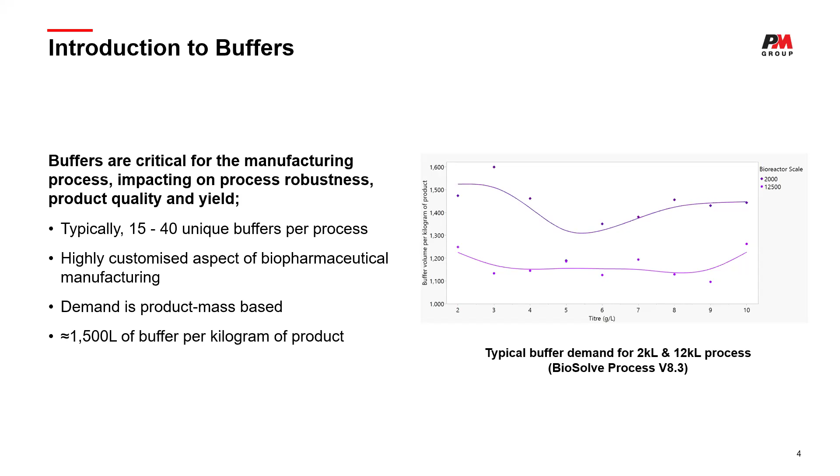If I start with overview of buffers, buffers are critical components of the biopharmaceutical industry because they have a great impact on the process robustness, the product quality, the yield, and especially cost. For the production of 1 kilogram of a typical monoclonal antibody, around 1,500 liters of buffers are required. And this is not just a single buffer, but rather 15 to 40 different buffers.

So a buffer is an aqueous solution of a weak acid and base pair, and a salt is normally added to set the ionic strength of the solution. The most important property of buffers is they keep the pH invariable when small quantities of a strong acid and base are added.

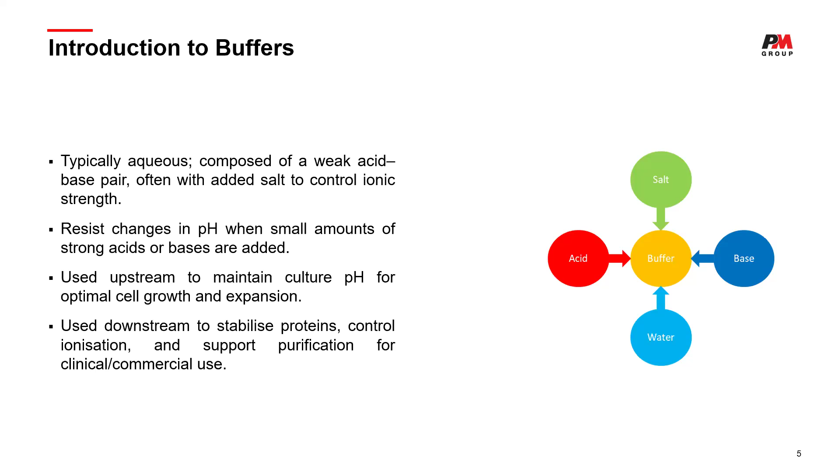So they are normally used upstream of the process to optimize the conditions for cell growth and expansion, or downstream to assist with the protein purification, control the ionic strength that is very important for the chromatography operation, and to stabilize the protein and ensure that it has the optimal biological activity for its commercialization.

Across the industry, we have like 10 raw materials that make up more than 90% of the buffers that are used for bioprocess. This is very important because many of the buffers share the same components, and this means we can standardize a bit the production process.

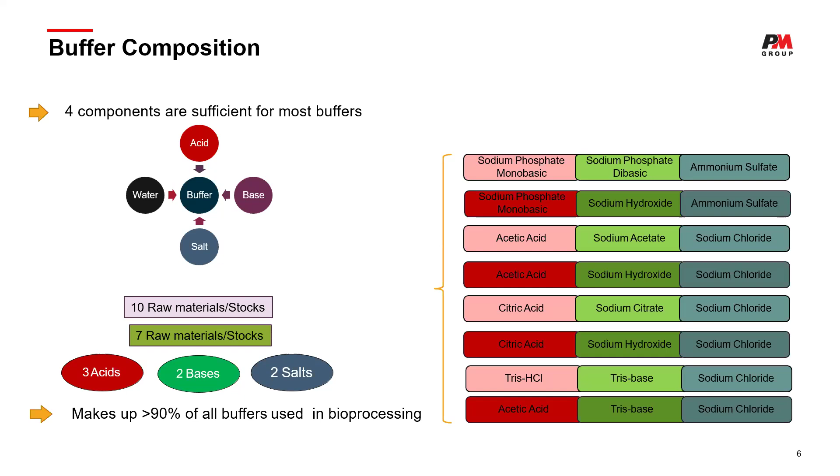However, the buffer preparation design is one of the most complex aspects of a facility design because they present many challenges. Some of the challenges are that they have a high capital cost involved because you require new equipment to be installed or you have to replace the equipment. The operating costs are very high too because of the large volumes that are required to produce the final product. They have a huge impact on the footprint of the plant.

They have ergonomic challenges, and they are normally a bottleneck for the process because you require large volumes in a very short period of time. They are dependent on the product mass. So this means if we increase the production in the bioreactor, we are going to have more protein delivered to the downstream process. And just to cope with that, we have to increase the capacity of the resin used in chromatography, or you have to increase the number of cycles.

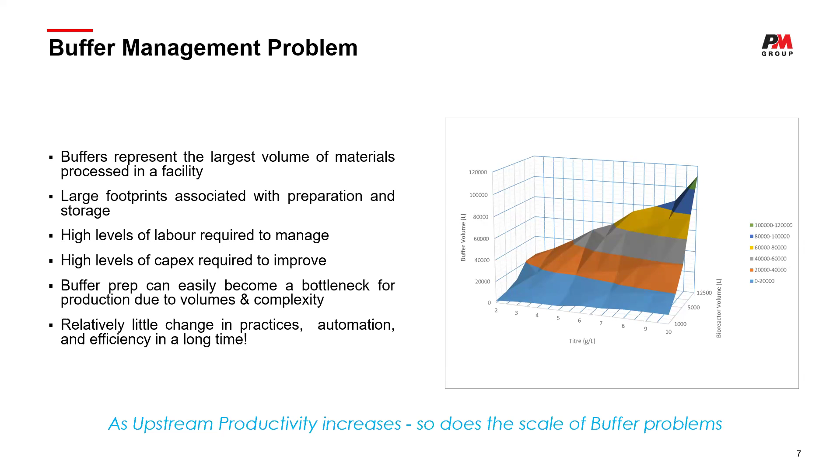That is going to increase the number of buffers that are going to be used. This is coupled with an increase of the WFI consumption. So we will have to produce more WFI to be able to prepare more buffers. That WFI has to be also stored. The extra capacity of the buffers will require extra capacity to be prepared, and they will have to be stored. And then we are going to have more waste. So even though this looks very complicated, it is feasible. It can be feasible sometimes, but it's going to have a great impact on cost.

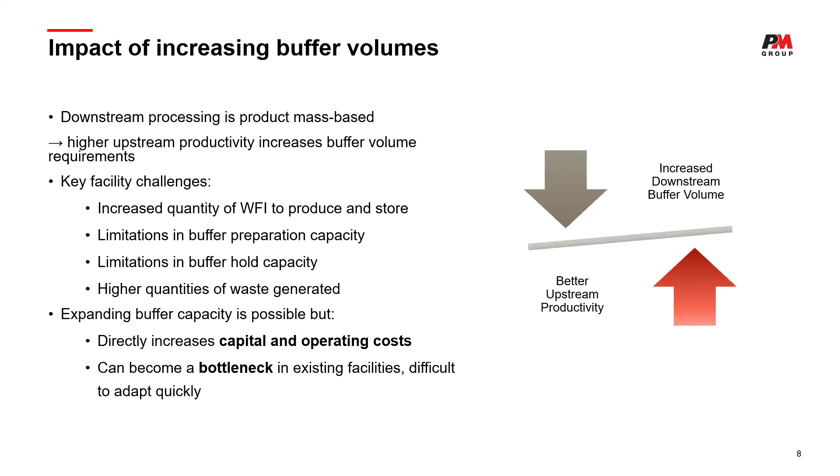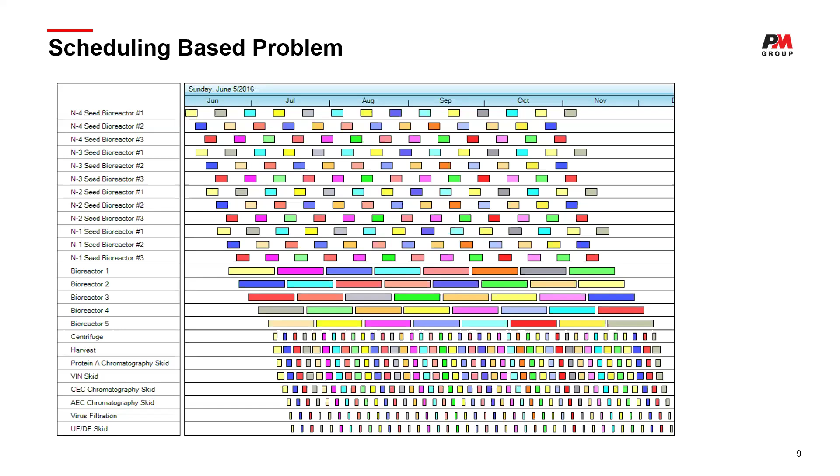But it's true that for certain existing facilities, when you increase the number of buffers significantly, you can have a bottleneck. And this bottleneck is just a schedule problem that is dependent on the buffer availability and how the equipment is operated. So what you can see now on the screen is a diagram from SchedulePro that represents different buffers and how they move across the production steps. Each color is a buffer, and you can see the buffers are delivered to the downstream processes with an interval of very few days. This can be 2 to 3 days for a very high throughput process. And what this translates into is you need to have the buffers prepared and ready to use in that short period of time.

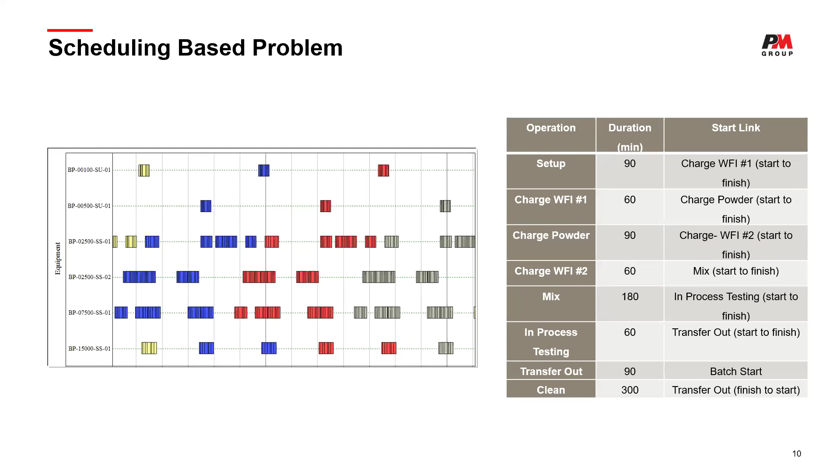Furthermore, each preparation equipment can only prepare one buffer per shift. A buffer typically takes between 8 to 12 hours to be prepared. And this is independent of the demand or the conditions that you have. So if you have an increase in the demand, you will have to achieve an equilibrium between the equipment requirements and how it is going to be operated.

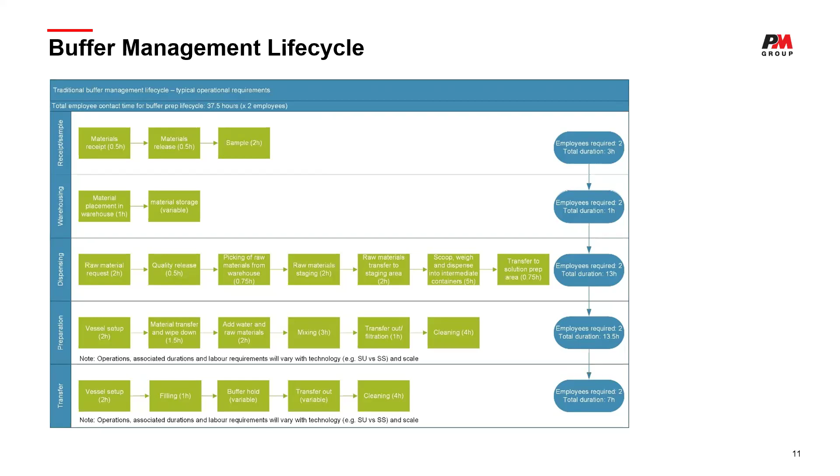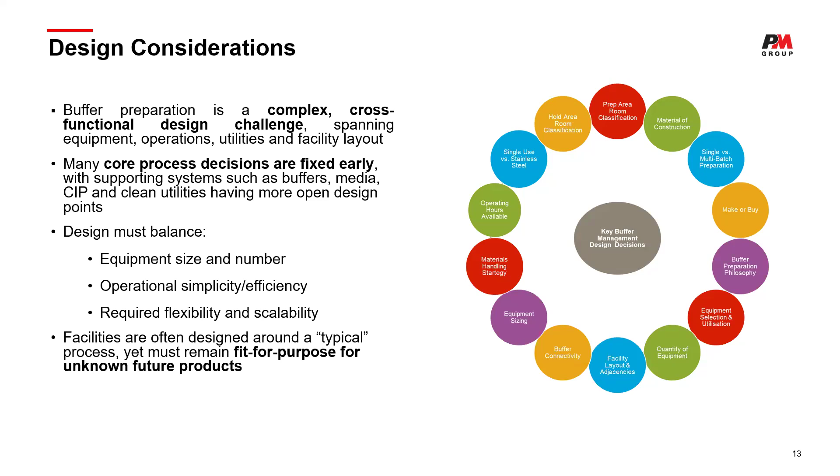So if we take a look now at the considerations we have to take into the design, there are many considerations from the equipment, operational, and layout perspective. So the design has to be able to achieve a balance between the equipment requirements and the scale, and it has to provide a facility that is easy to operate and flexible for new materials. I know that here there are many considerations, but I'm going to talk about them in a classified way. So if we start with equipment, the first consideration that we have to consider is do we want to go single use or stainless steel?

Both of them have advantages or disadvantages, and probably the solution is going with a mix of both. So it's true, the modern facilities tend to go with single use because of the flexibility that they give, and because they are contained vessels, the risk of getting contamination is lower in these ones.

However, in the end, the decision is going to be based on size. If your buffer volume is less than 3,000, you can select a single-use mixer. But above this volume, you will have to select a stainless steel vessel. In both cases, you should always operate between 30 and 90% of the volume just to allow for a good agitation. And it is always recommendable to prepare 10% extra than the volume that you're going to use for the process to compensate for the possible losses that you're going to have.

Another consideration is what technology to select for this preparation. We will talk about this a bit later. And what's the quantity? So how many stainless steel vessels do we need? Do we need heating and cooling conditions to prepare the buffer? If so, how do we consider the jacket, a thermal control unit for this? What are the utilities that we need to prepare a buffer?

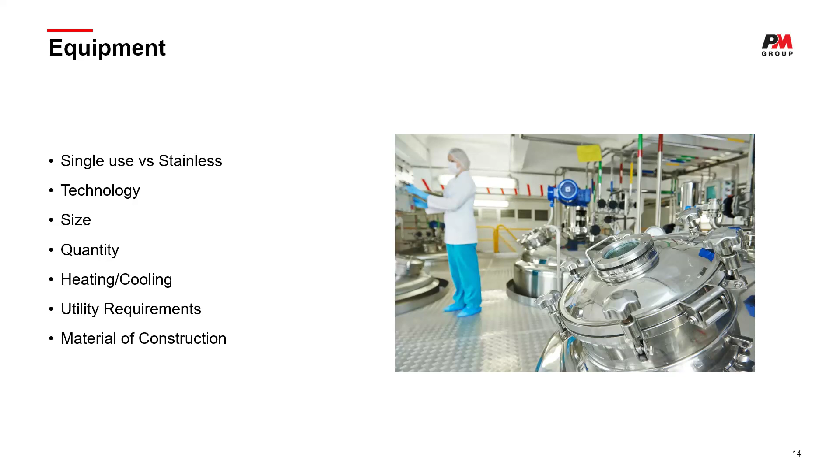So for the traditional way, you normally require process air, you require WFI, and you will have to install a vent. And then what's the material of construction? Stainless steel is not always good; it depends on the buffer concentration that you will have. Sometimes you will have to go to a higher grade or even an alloy.

In terms of operational aspects, you have to consider how much staff is going to be needed to prepare the buffers that you need, how they are going to operate, what's the shift pattern, how many materials you're going to have because you have to allow for space. Are the ergonomics okay for the people that are going to work in the area? And what's the preparation strategy that they are going to follow?

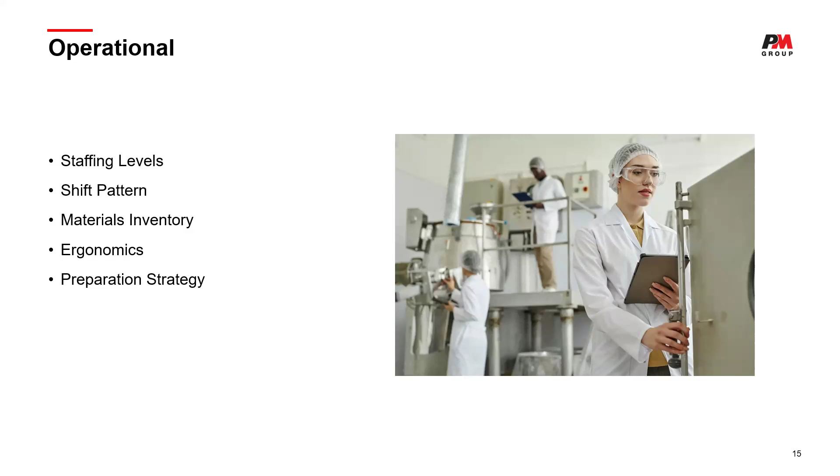For the layout, you have to consider room classifications. Buffers are normally prepared in Class D ISO 8 clean rooms. For buffer hold, for the storage, traditionally they were contained within clean rooms with similar classification. But nowadays, the industry is striving to have them installed in unclassified controlled areas because it means large savings in terms of cost. You have also to allow for material and personnel flows in between the two areas. This is normally done through airlocks.

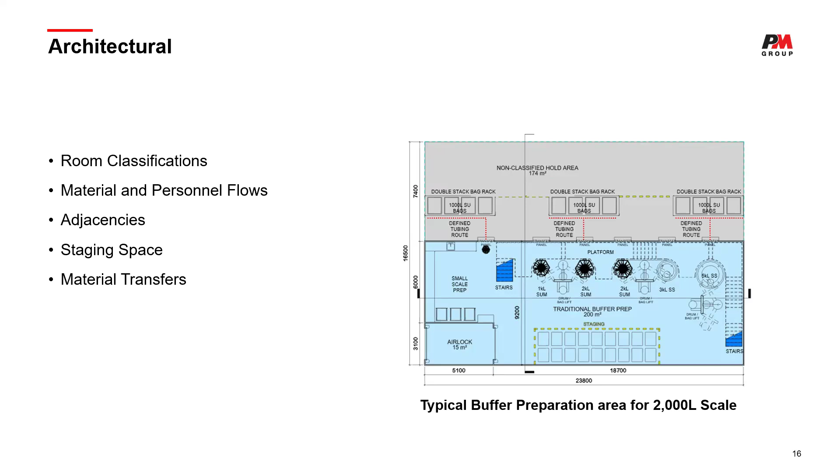You have to provide a staging area to place the raw materials that are going to be used for this preparation. And then you have to design the material transfer. Once the buffer is prepared, it has to be filtered to eliminate any possible bioburden, and it will be done through the wall of the clean room using a pass-through technology, and it's going to be controlled by measuring the weight. And then you have also to see how you want the adjacencies. Do you want the hold area connected directly to the process, or do you have to bring it closer to the production area?

Well, nowadays there's a change in demand. It is true that when you design a facility, you do it for a specific process, but the facility has to be good for unknown future processes too. So the industry is looking for more flexible and adaptable processes. They want to be sustainable; Kevin will talk about sustainability in a bit. They want to be innovative, and they want to try to reduce cost, because buffer preparation has a huge cost associated with it.

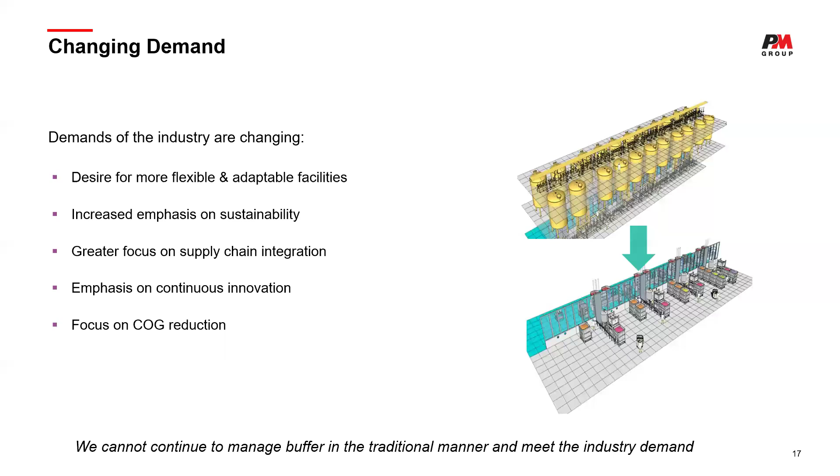In terms of the ways to prepare a buffer, there are 4 main philosophies. The first one, purchase ready to use, means that you outsource the buffer preparation. You buy the buffers ready to use from someone else. The second one is the traditional buffer preparation, where you prepare this multi-component solution at the final required concentration, so it is ready to be delivered to the process.

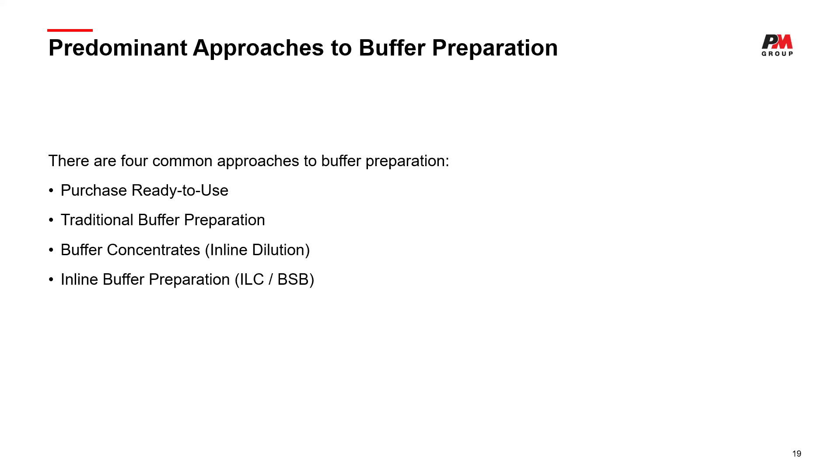The third one would be buffer concentrates or inline dilution, where you prepare the buffers at a higher concentration than required by the process. So this will require an additional step of dilution to adjust the concentration to the required one. And the fourth one, inline buffer preparation, also known as inline conditioning or buffer stock blending. You prepare the buffers inline from stock solutions at the final concentration too. So let's go a bit more into detail for each of them. The purchase ready to use is becoming increasingly common for small facilities because of the advantages that it presents.

So this philosophy allows to reduce capital cost, because the facility is not preparing the buffers, they can save in equipment. So it helps to reduce bottlenecks, and most important, it has advantages in terms of safety, because operators are not exposed to the raw materials. They have less problems with ergonomics, and they don't do repetitive tasks that they would do if they prepare the

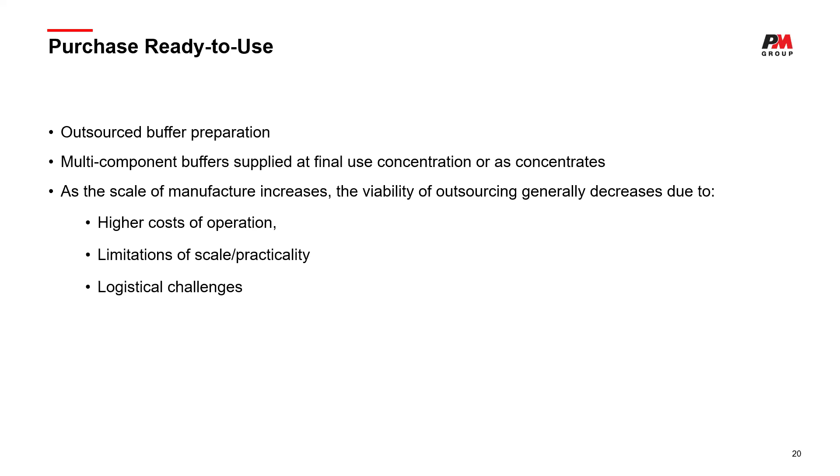buffer in-house. However, for larger scale, it has many limitations, because this philosophy has problems for scaling up. It has logistical challenges, because the in-house loses control over the production, and you depend on the market, and it has higher cost.

If we just jump to the traditional buffer preparation, you mix the raw materials in a single-use or a stainless steel vessel, and you get the buffer at the concentration that is needed to be used with the process. So normally you don't go directly to the process, so you require to hold the solution for an amount of time until it is used.

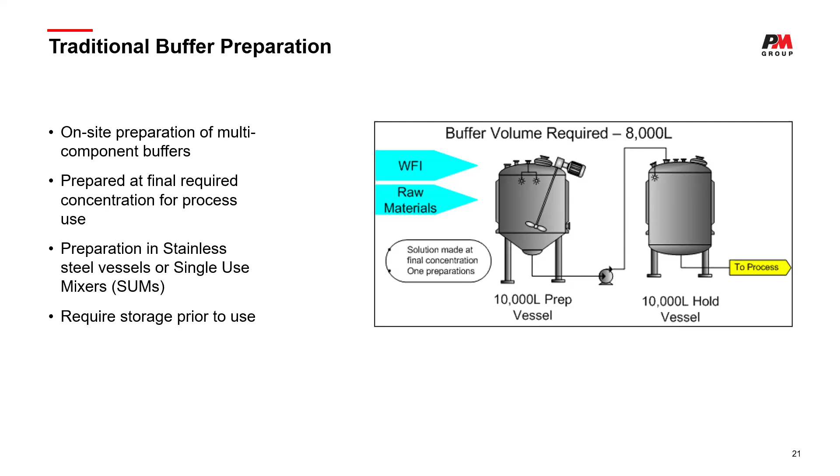Buffer concentrates is very similar to the traditional way of preparing buffers, but as we said, the concentration is higher. And even though you are using the same raw materials, the same quantities, the initial quantity of WFI that you use is very low in comparison, so that allows to reduce the capacity of the equipment that you're going to use. So the challenge here is, because the buffers are very concentrated, you can have pitting corrosion, so it is very important that you select the correct material of construction for this preparation.

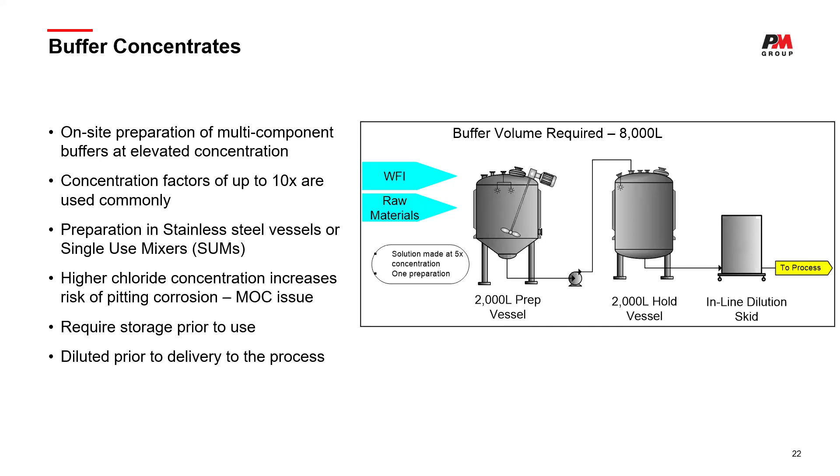So you also need to dilute the buffer before using it in the process. This can sometimes be integrated with the chromatography skid directly. And another thing that you have to consider is how much you can concentrate the buffer. This is normally a parameter that is calculated in the laboratory, but it's going to be dependent on two main things. The first one is the common ion effect. This means if you have many raw materials with the same ion, you are going to reduce the solubility of the components. And the second one depends on the least soluble component that you have in the mixture. So these things have to be taken into account when you decide the concentration of the buffer.

And the last method, inline buffer preparation: you have the acid, base, WFI, and salt, and you blend them inline to get the buffer at the final concentration. This is done and controlled by analytical instruments such as mass, pH, or conductivity. So what is important here is you can go directly to the process because you have the concentration and everything ready to go. So you can avoid having a hold tank, so you can save that capital expenditure.

Also, you have individual stock solutions, quite concentrated. And as we said at the beginning, you only need 10 raw materials to get to 90% of the buffers. So with a very small amount, you can produce almost all the buffers that you need, and this philosophy allows you to do that. If we compare this with the traditional way of preparing the buffer, it has advantages: the footprint that it occupies is lower, it requires less consumables and less labor.

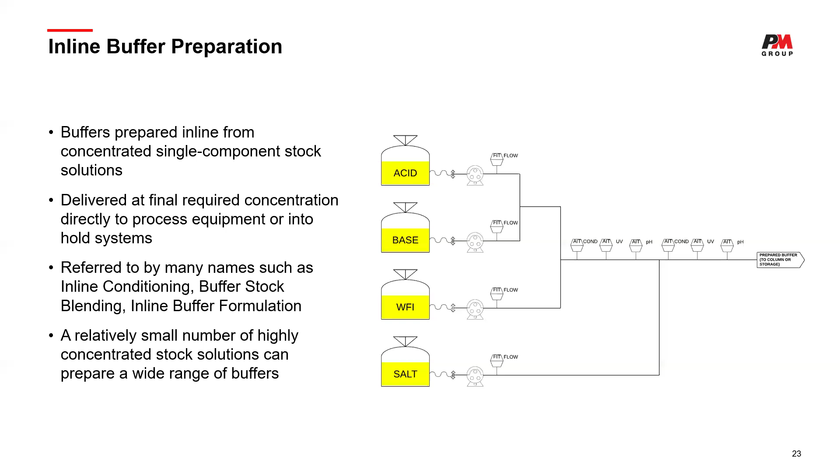So now, do you? No, I've got another one.

Thanks, Maria. So, as Maria mentioned, buffer management is a big problem for the industry. The biopharma industry has been developing at a rapid pace. There's a lot of innovation. Buffer prep is completely overlooked. We've seen massive increases in product titers. The example I would have given a few years ago: if you have a 10,000 litre process at 2 grams per litre, you need 20,000 litres of buffer every batch. If you brought that up to 10 grams per litre, you need about 120,000 litres every batch.

When I first started using that example about 9 years ago, that was an extreme case. Now we're looking at product titers far higher than that, even at scale, where I'm looking at processes with 400,000 litres of buffer per batch. Granted, that is at the higher end. When a batch is every 2 days, the amount of material is enormous, but the industry still hasn't changed. One of the groups I've been involved with for the past few years is BioPhorum.

So for those who aren't familiar, it's a cross-industry collaboration coming together to solve problems of common interest. They published a technology roadmap back in 2017 and identified buffer prep as one of the big challenges. Through that, we formed a buffer prep work stream, which I think was back in 2018. And through that, we designed and built a prototype skid. We did it in collaboration with NIIMBL in the US, which is the National Institute for Innovation in Manufacturing Biopharmaceuticals. So they helped co-fund this skid.

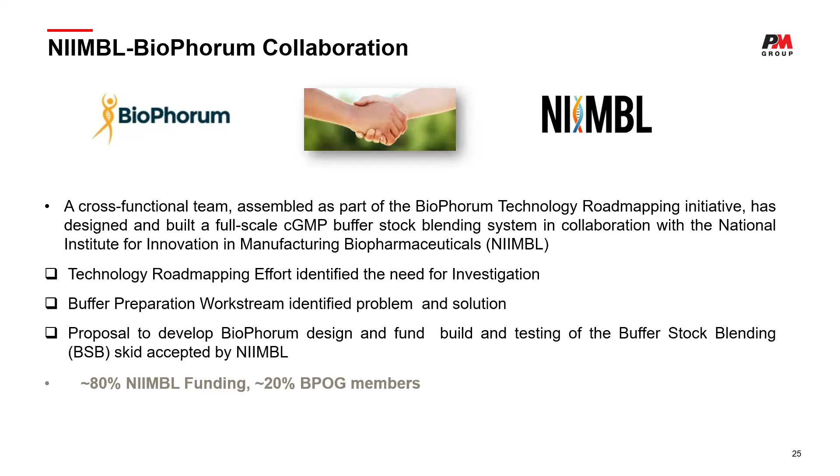So to give an idea, and again, I'm not going to read through all the names, but when we talk about a cross-industry collaboration, you have engineering designers, so myself as part of the team. You've got skid suppliers, Asahi, Cytiva, I'll touch on that again later. And you've got a lot of the leading manufacturers, your MSD, Sanofi, Regeneron, Biogen, Lonza, and whoever else I've offended by leaving out in the list of names. But it's a real example of trying to design by consensus.

One of the things that is out in the market, so the first question we were asked is, there are inline systems on the market, and there were back when we started this work. Cytiva have an inline conditioning system. Asahi Kasei have an inline buffer formulation system. Both of those can do this. You notice both of those were involved in this work stream as well.

So this wasn't just about building a skid, which we did, and there were good outcomes from it. It was about trying to prove the technology, that a lot of the benefits I'll talk about, this type of technology, any of those skids will do. So it's not that you have to buy this skid. It's trying to increase that awareness. And some of the main reasons we did it were to design a system that has consensus.

So when you put complex buffer chemistry equations in front of people, they lose the will to live most of the time, but they're very difficult to understand. People don't understand the complexities of it, and it's much easier to put a defined mass of acid, base, salt and water together, mix it, check the pH. Also, the costs are very high. So look, that is a disadvantage of this technology, for capital cost in particular. And also, people are scared of what's new. Nobody wants to be the first to try a technology without proven data sets and test results.

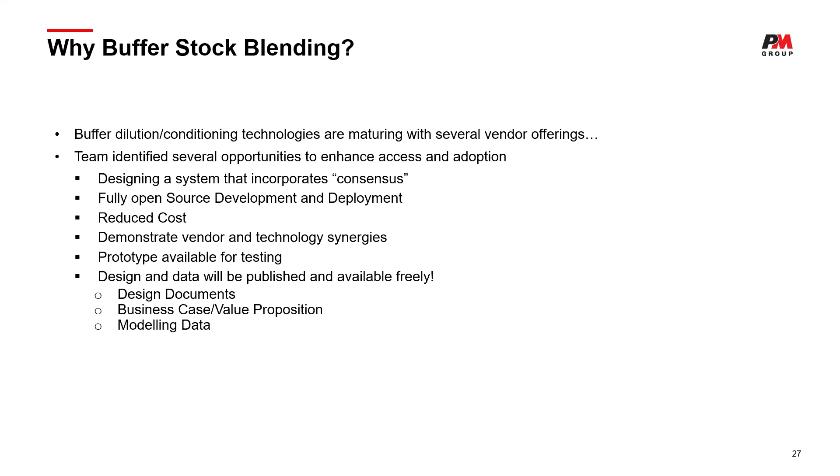Ultimately, I suppose, the system was designed, it was built, it was tested, and it's installed in the University of Delaware. Again, I'm going to give some highlights here, but for people who are interested, the full design documents, and there's about 4 or 5 papers as well, are on the BioPhorum website. Look, for the students, I can send on a link afterwards with some of those if you're interested. One of the advantages with this system, and probably one of the reasons why I talk so much about buffer, is it's in a more non-competitive space. We can actually publish the P&IDs, we can publish the functional specifications, and anyone can access it.

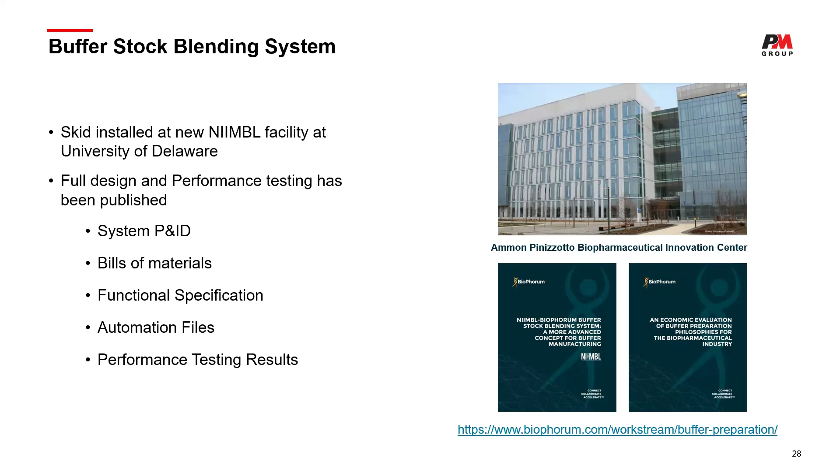The skid itself, this particular one, we could make buffers at 8 to 60 litres a minute, and connect up to 16 stock solutions. Probably one of the main features that's simplified is it's a mass flow based system. In a couple of slides, I'll compare the different types of control methods.

For me, the biggest part of this particular design is it's customizable. So yes, we want to standardize, but different processes will need different numbers of pumps, different elements. And the idea is we wanted to make a base skid that you can take and apply. Say this would be typical for a 2,000 litre bioreactor scale facility, but also you can scale it up and scale it down. And by publishing the engineering details, in theory, you can go to any skid manufacturer and, I suppose, reduce the time to get it to market.

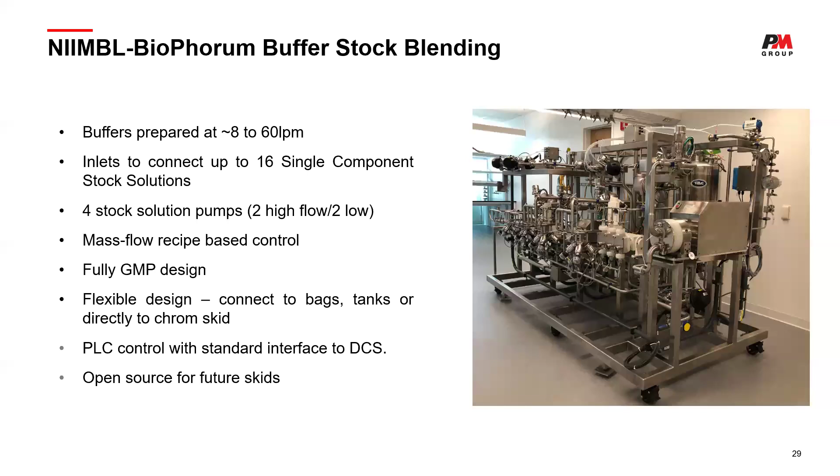The skid itself, WFI would come in through an integrated break tank. Other systems on the market will bring WFI in from a bag in front of it. Both of those options work. The key there is having a pressure break. For a mass flow based system, ultimately your final pH and conductivity, which is what we're releasing the buffer based on, if you change the proportion of mass flow, you're going to get a different buffer. Varying pressure in your WFI would cause that to trip out, hence you need the break system.

Now, the release on this system is pH and conductivity. We are looking at other approaches, more looking at buffer composition and more PAT type applications that can be built in as part of future skids.

We have, in this case, 4 solutions. Different systems on the market operate in slightly different ways. The Cytiva ILC system will mix your acid and base, then add your water, and then add your salt with multiple static mixers. In our case, up to 4 stock solutions mix into a single line through a simple static mixer, with 2 pH probes.

One of the biggest issues on ILC systems in general is the pH probes - salt memory effect, pH probe drift. Ultimately, you need to calibrate these every single day, every batch. I suppose they're probably the biggest barrier on these systems. The 2 pH probes help with the salt memory effect, one route for high salt, one route for low salt, and it helps with stabilization time.

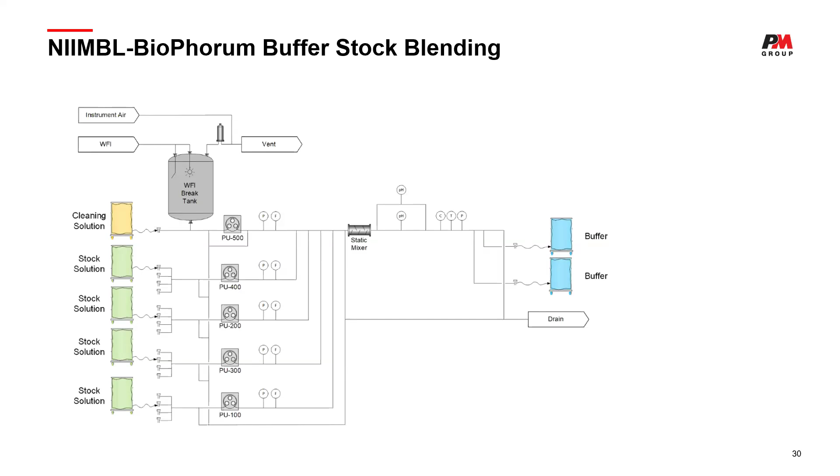Why does it matter? In terms of the mass flow, what do we need to control? Some of the other systems on the market have different ways of controlling. In both the Cytiva and Asahi systems, they can do mass flow and they do pH flow and pH conductivity. For our system, we just went with a simple straight mass flow. In development, having the other options is absolutely fantastic and helps you get to a recipe. From what I've seen a lot in production, they prefer the mass flow because it's a defined controlled input, defined controlled output.

The big disadvantage with mass flow is if you get variation in your stock solution concentration, the system won't adjust for it and you'll fail your spec. Some buffers are very sensitive to temperature. The majority that we deal with in bulk biologics wouldn't be, but in theory, if you were coming from a hot WFI loop into a point of use cooler, variation in temperature could throw it off.

And obviously there's an inherent variation with your pumps and your flow meters. We're using Coriolis flow meters - they're highly accurate, but you do need to control your inputs. It's worth noting that when you use your inline conditioner, your buffer stock blending, you still need traditional buffer prep to make your stock solutions. So the industry is well used to doing that, so you can get the careful control you need.

If you do a pH flow, you can vary - in those systems, it can dynamically vary the concentration of the different stocks to hit your target pH. The downside is pH probes are far less reliable than a Coriolis flow meter. Similar to pH conductivity, one of the big concerns of the pH flow and pH conductivity from QA and quality is, in theory, you can vary your composition of buffer for every batch. Yes, you're meeting the right pH and conductivity spec, which is critical, but I've seen from a quality perspective, people are more comfortable with mass flow in production.

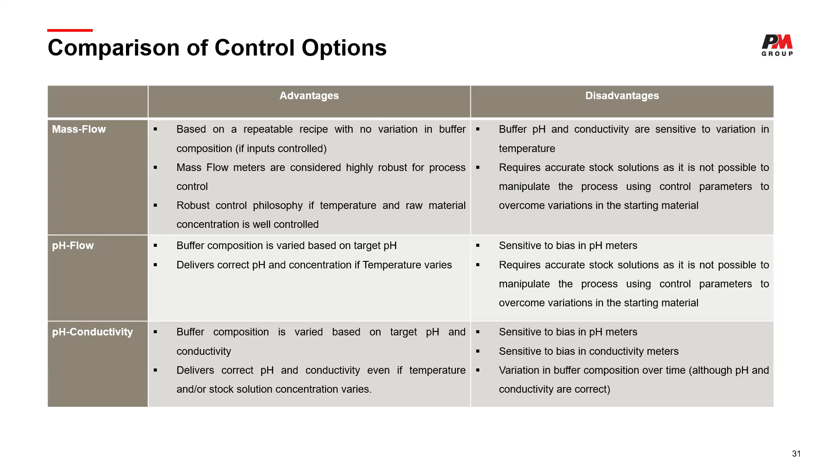What do we care about when it comes to making a buffer? The group we came together at BioPhorum, we picked 6 main things. You have to achieve a stable pH and conductivity - that's a given, if you don't meet the required quality, it's not a viable solution. You have to get to the right target flow rates. We also care about the time to collect the buffer.

When you start up these systems, you're going to have to run to drain until you get into spec. The longer that takes, the more you're literally flushing stock solution down the drain - what's the percentage of stock solution wasted? How reliable is it? It's fine to get into spec, but can these systems stay in spec? When you're running a downstream operation over a few days, you can't be drifting in and out and have a stop-start process. And also, what's your dilution factor?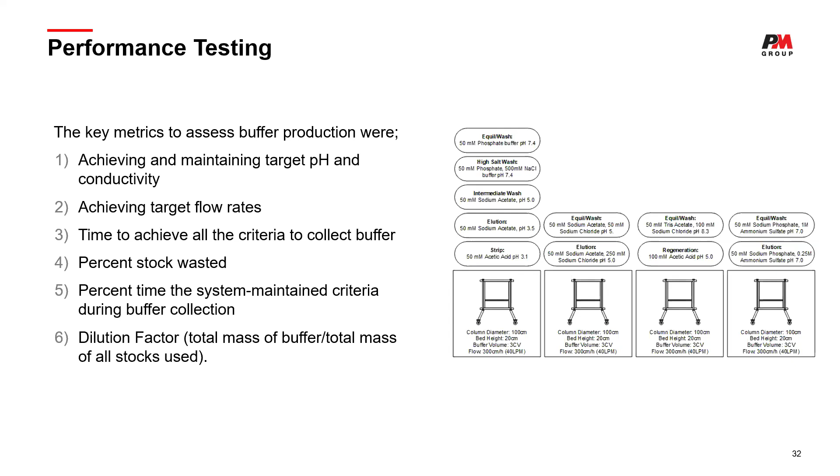One of the advantages - I know Maria mentioned the common ion effect and multi-component buffers. For a single component stock solution, you don't have the common ion effect. You can go more concentrated on those solutions. Again, that brings material construction challenges, or certain materials aren't great in single use. But how can you maximize that and have your stock solutions last longer?

The results from the buffer blending system are shown on the screen. Again, it's just to reiterate, the other systems on the market absolutely perform in an equivalent way, and they do work. What we found for pH and conductivity, we had a standard deviation of less than 1% across the runs. We're able to make all the buffers in spec. We also did offline sampling to validate the result of the probes on the skid. You can see, on a zoomed out version over a couple of hours, it's very stable, with a little bit of tracking at the very start - there's a slide on that later - less than a minute until you get into spec, and then a very stable flow.

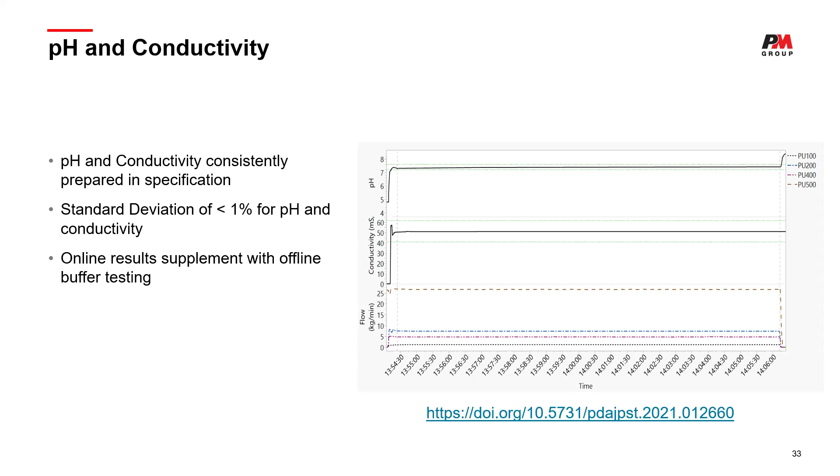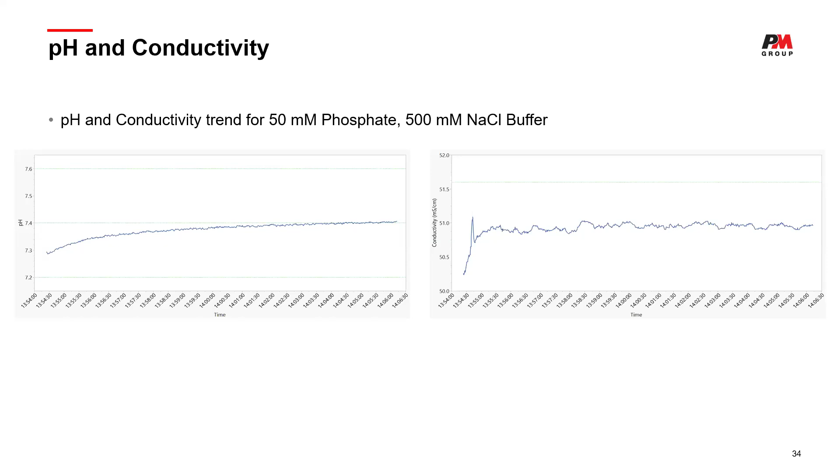Here's a more zoomed in example showing the pH and conductivity trends for a typical 50 millimolar phosphate buffer. In this case, we actually started off in spec, but as time went on, the band got tighter. Generally these systems work well, and they're even better for larger preparations running longer. With very small preps, you lose some of the efficiencies.

Similar story with flow rate. On this particular skid, we had a combination of Quattroflow and Lewa pumps, two of each on the stock solutions, and the whole point was to test and compare. It's exactly how you wouldn't design a skid for industry, where you'd look to standardize, but we wanted to try all the different pumps. Is there a difference? The short answer is they both worked. There are nuanced differences, but both worked. In the zoomed in versions of flow, yes, there is more pulsing due to the nature of the diaphragm metering pumps.

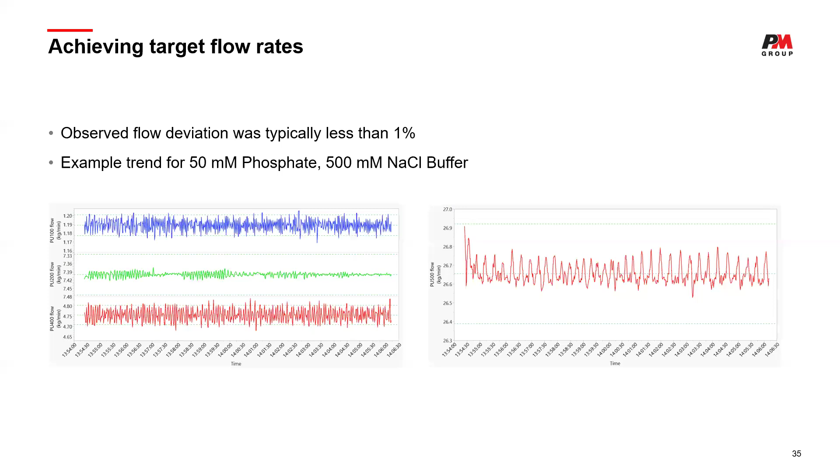But again, flow was within spec and stable. In terms of time to collect, some buffers go into spec from when you hit start and the pump starts within 10 seconds. I'd say the average was about 23 seconds. The longest, this graph is from when we'd fine-tuned the pumps and configured the skid properly, but even in early days it was less than a minute before it got into spec.

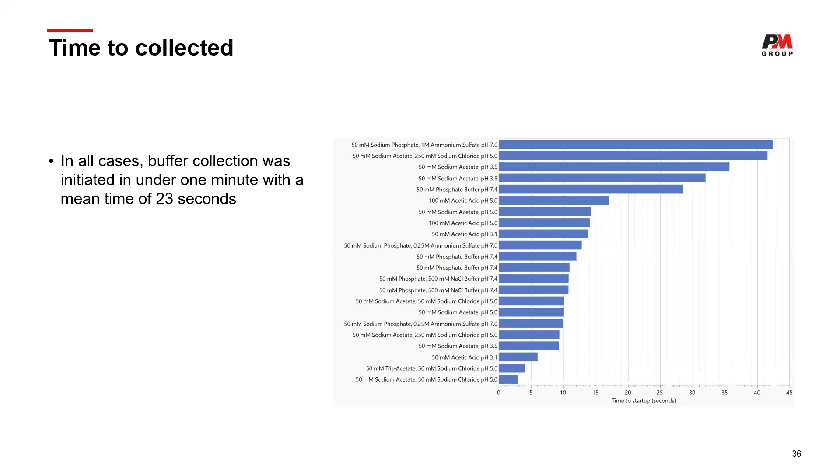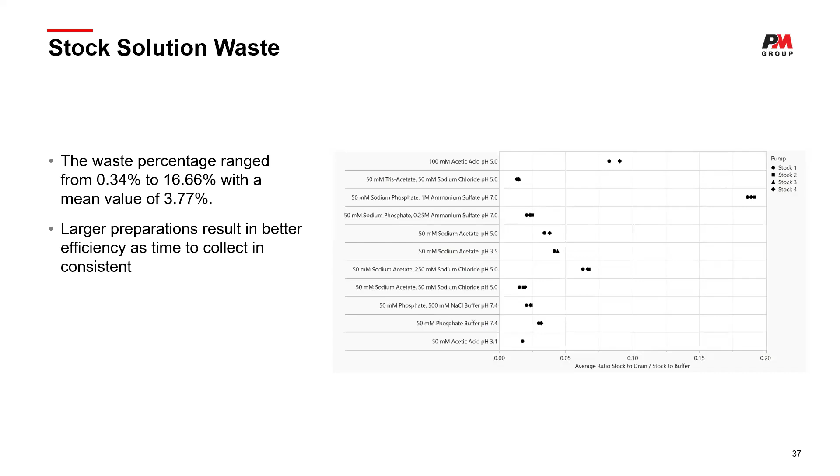When we look at stock solution waste, you're talking 3 to 4 percent of the stock solution ends up going down the drain. That was in our performance testing, in a lab where you're making a couple hundred litres of buffer at a time. Where this becomes important is if you're making 100 litres of buffer and running for 30 seconds of flow, it's a higher percentage than if you're making 3,000 litres of buffer, where it's still only 30 seconds and then you're running stable for the rest.

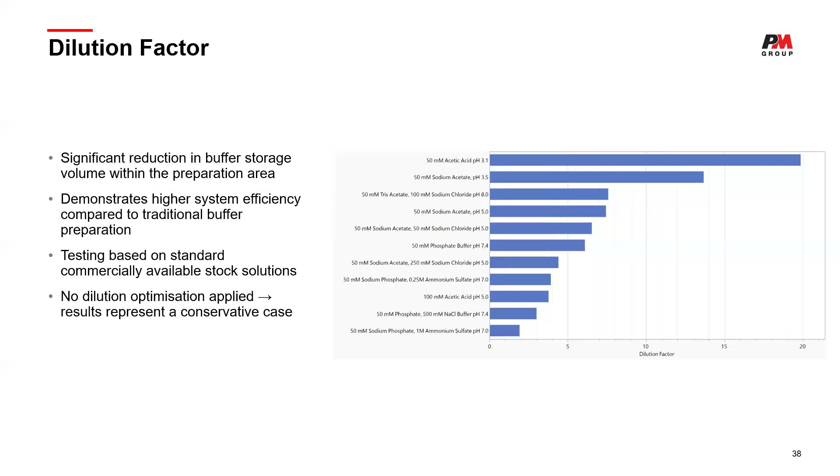The dilution factors we had in the lab in Delaware were up to 20, and probably as low as 2 or 3. To be honest, the chemicals we used were what we could get available from people on the BioPharma team, so we took what was available rather than maximizing it. A lot of my work in the last few years has been developing approaches to optimize stock solution selection. I won't bore you too much on the PhD element of it, but there are good papers out there now showing how you can take it further and maximize the benefits.

If you start with an inline system, you spend the first few hours of the day calibrating the pH probes and setting up your stock solution, and then in theory you can make your 3,000 litres of buffer at about an hour each and be done during the day. Traditionally buffer prep is 24/7 and labour intensive. For large scale facilities it's still going to be 24/7 and labour intensive, even making stock solutions. And certain buffers like diafiltration buffers, people aren't using ILC systems for that yet.

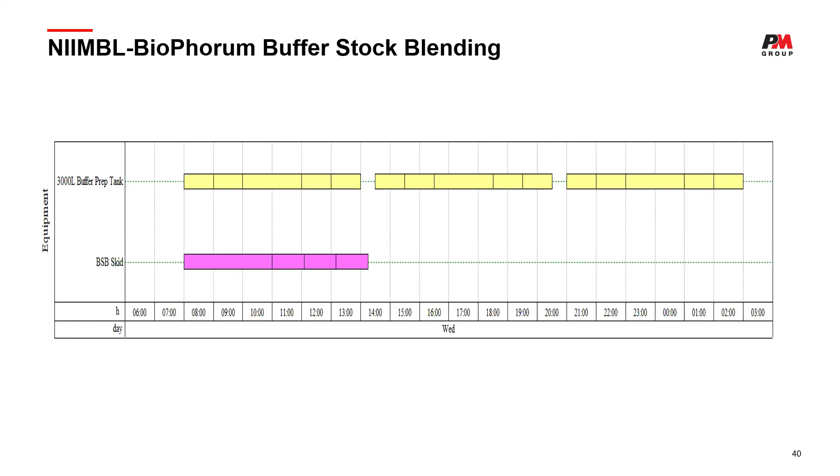There's more concern as you go further down the process. Chromatography buffers are probably the ideal example. By running these much faster, for smaller scale facilities there are opportunities to change the way we operate. Rather than 24/7, you can get to a point where you have one or two shifts, working Monday to Friday only, actually having that time to recover. Even if you need more operators on a per shift basis, ultimately you can reduce the labour count for buffer and allocate those people elsewhere where they're needed.

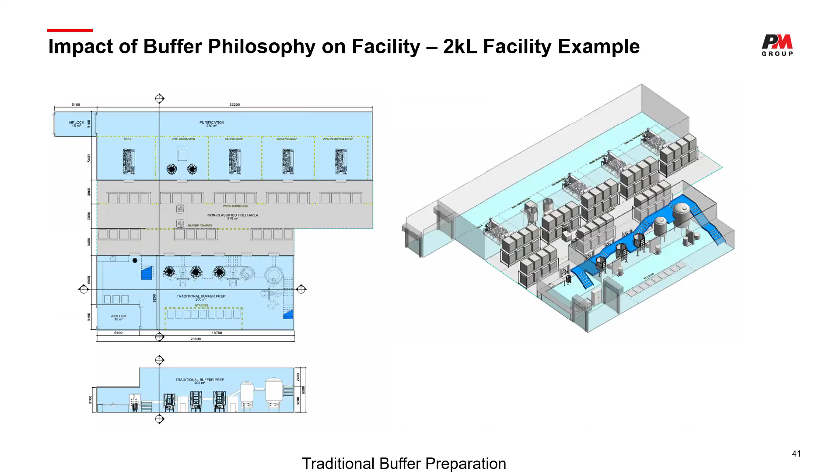How does it look for a facility? So this is an example layout for a 2,000 litre facility. In the prep area, you've got 2 tanks, 3 single-use mixers, small scale prep area, buffer hold on the outside.

For the inline buffer prep systems, there are 2 ways we can do them. We can run them as a buffer kitchen, where you put the buffer prep skid in the buffer prep area, use that to prepare buffers, and then they go into hold systems and go to the process in the normal way. From a layout point of view, there's not much difference between traditional and buffer kitchen. Where there is a difference is on debottlenecking. This is a good option to debottleneck a facility without making wholesale changes to the process.

The other way you can do this is doing it on demand. Some systems out there, like Cytiva's system, have inbuilt chromatography capability, so your chromatography skid has the ability to do inline conditioning. In that case, the buffer prep area is making stock solutions. We can get down to 2 single-use mixers, and those mixers would also be used for other buffers like diafiltration buffers or any non-ILC. The stock solutions connect to the process, and the process makes the buffer on demand. In this example, you're saving 55% of the space compared to a traditional buffer prep.

There's a big push on projects. We need to be more efficient. There are various sensitivities. We need to reduce the cost of goods, reduce the cost of manufacturing, and reducing the footprint is a significant way to do that. It also brings down HVAC demand, reduces clean rooms, and has sustainability benefits.

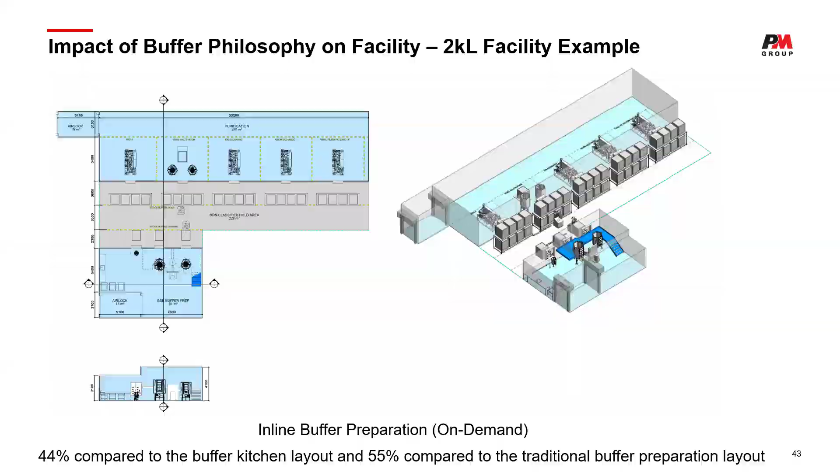In terms of economics and environmental impact, I'm not going to go into a massive level of detail here. On the BioPhorum website, there's an economics paper I did back in 2019, which goes through all aspects of this and has the defined numbers and full numbers. In general, what I found, we did it for 2,000 and a 12,500 litre scale, again linked back to the typical processes from the BioPhorum technology roadmap.

What we found at the smaller scale, the capital cost of inline was higher. The skids are expensive, there's no way of getting around that. But there were savings on operating costs, labor demand, pretty much everything else, and the overall cost of buffer is dramatically reduced. Equally, going with buffer concentrates and inline dilution is far better than traditional.

My first takeaway is that traditional is not the answer. In reality, it's going to be a combination of different approaches. It's not that you'll make all buffers with inline or all with traditional. Once you get up to the very large scale, inline buffer prep probably has the lowest overall total cost of buffer and net present cost.

The big red there is on the consumables. It's shown as red because the cost was higher, but what that really means is you're enabling single use by making the volume so much smaller that now you actually have a choice. It doesn't mean it's mandatory to use single use. The red was more from me taking a straight criteria of if the volume is below X, it was 2,000 litres at the time, we're using single use.

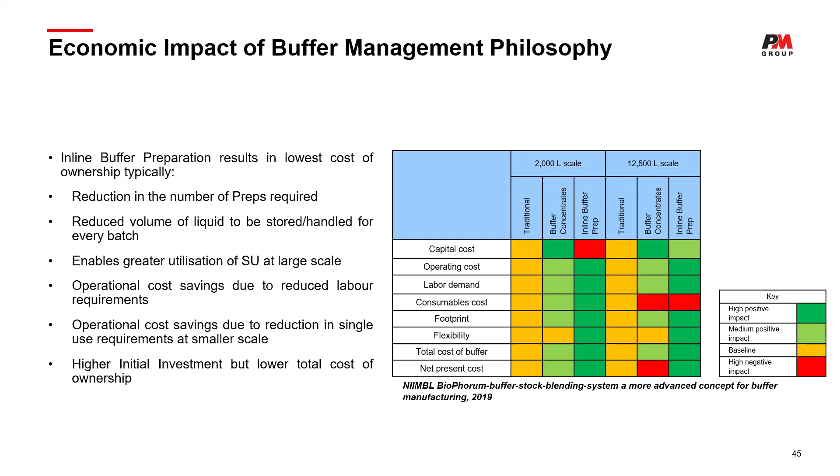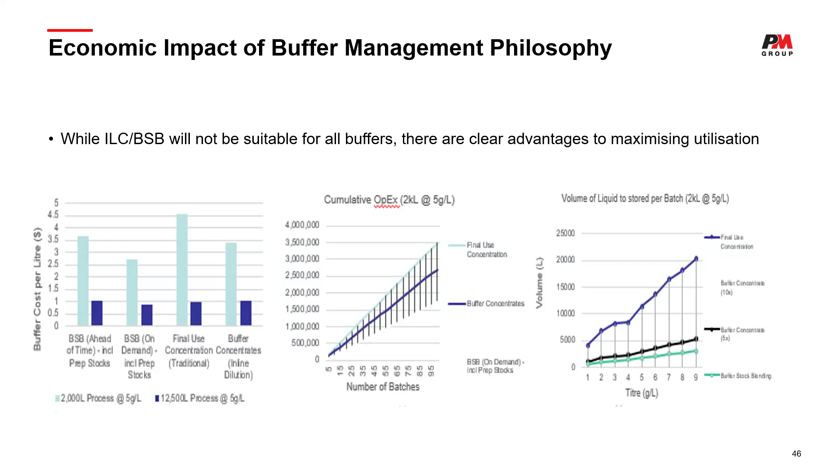The big advantage, even though you have to prepare your stock solutions, is that it'd be quite common to have 5, 7, 10 stock solutions that can make 20 buffers. So now you have to do 10 traditional buffer preps instead of 20, and each of those preps, because they're more concentrated, can last for a lot longer. What we found is it can pay for itself in 100 batches. Now, you can't always convince the project side at the start about overcoming the initial investment, but the benefits are there, and a lot of companies are using these approaches now. Not as many as perhaps should be.

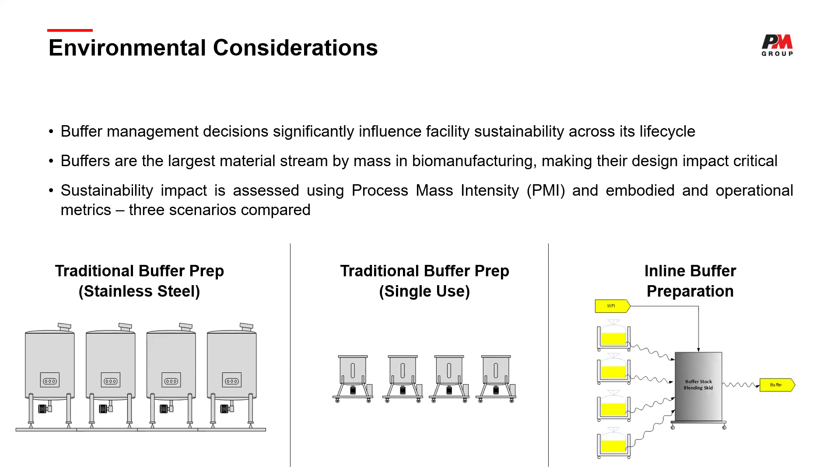The other thing, as well as the economics, we also need to think more about sustainability. It's really important we start to integrate sustainability into the process design. Full life cycle assessment is the best way to go. In this case, I'm going to talk to you about some of the work I've done using sustainability indicators or metrics, looking at process mass intensity, embodied and operational energy.

Ultimately, using those metrics, and the reason I use those is they're really easy to integrate into a design process. And when I screen some of these systems, I might look at 150 scenarios. I'm not going to do a full LCA on the 150 scenarios, whereas using some of these metrics means I can build it in. When I look at process mass intensity, it's the mass of materials required to go in to produce 1 kilogram of product.

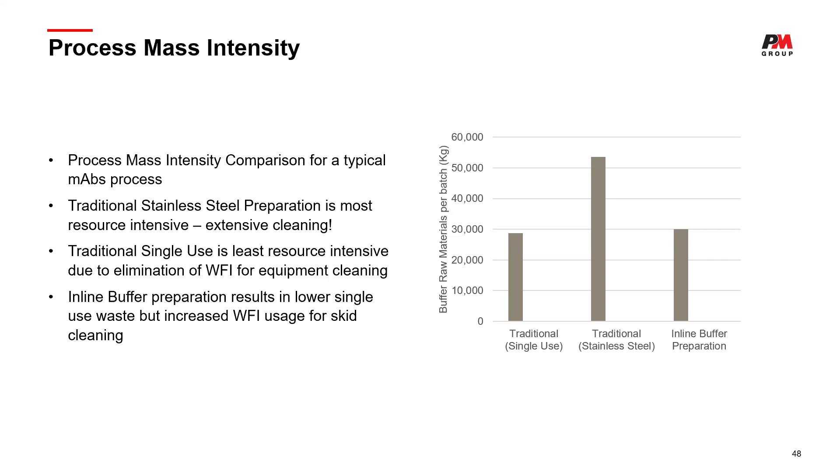No surprise, traditional stainless steel is worse than traditional single use because I've factored in cleaning. Now, some of the PMI studies that were published in the past haven't included cleaning. The ones I've done have. I think it's a bit disingenuous to exclude it, especially when you're using highly purified water. Inline buffer preparation ended up being slightly worse than traditional single use.

When you look at embodied and operational energy, and you could do the same for embodied and operational carbon, again, a very similar metric. Single use outperformed stainless steel. Inline buffer prep in this case was marginally better than single use. Depends on where in the world it is, where you're getting your stainless steel, what's the embodied energy, how much recycled. I suppose the point is, even with those different metrics and indicators, you're getting similar themes.

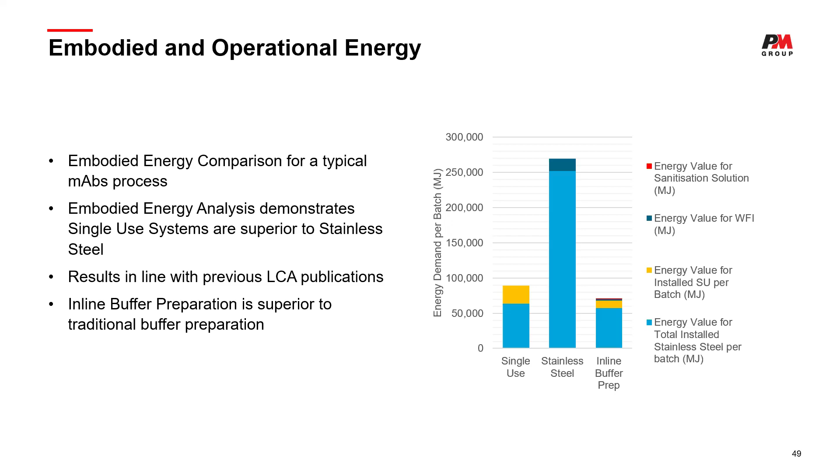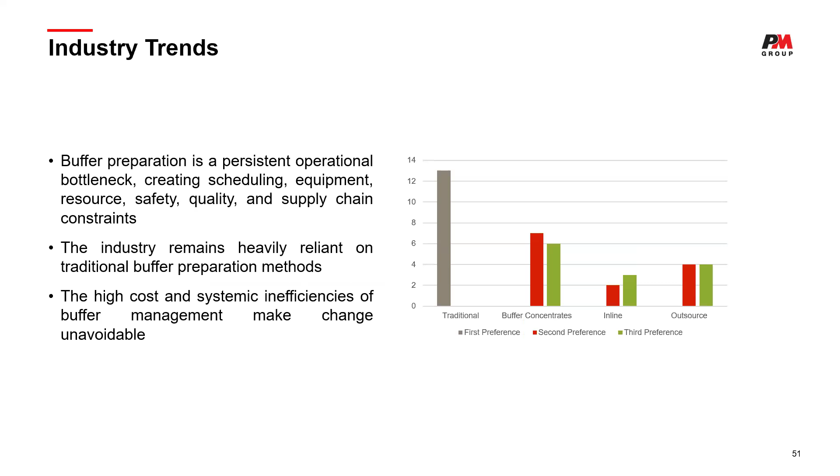The thing of most interest for me in the context of buffer prep is the economics and the environmental actually align. So the cheaper one to run is also the more environmentally sustainable one. It's not often we get that right blend. Despite that, the majority of the industry is still using traditional buffer prep. A lot of new facilities now are moving, but we did a survey with BioPhorum, and out of the responses, every single one of them, a traditional prep is the most predominant in the network.

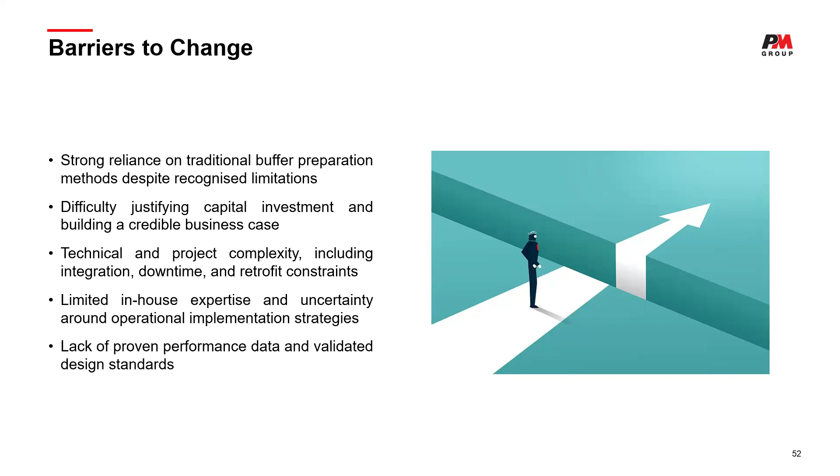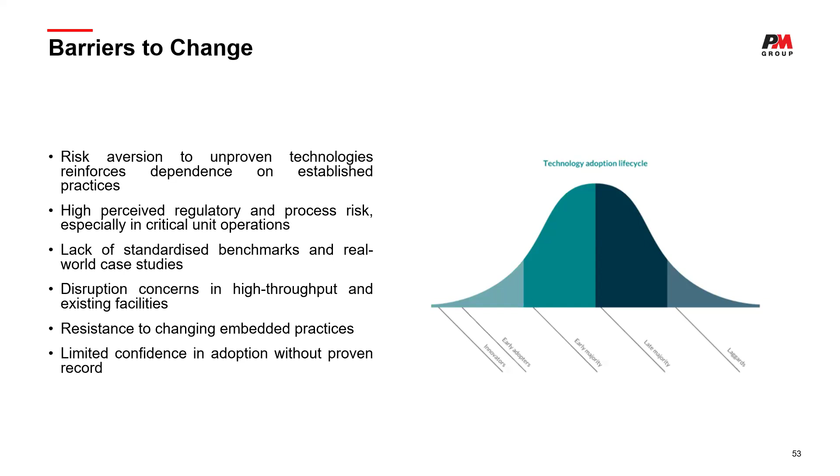The industry is slow to change. Why? I suppose difficulty justifying the capital. Again, hopefully some of these papers and some of this work is going towards that. They're deemed complex. There's limited experience and lack of proven performance data. Now, again, that's something we're looking to change through BioPhorum and having those industry working groups, but it's still a barrier to overcome. Also, people don't want to be the first to adopt these things. Now, we're at a point where so many have them, you're no longer the first. But these are the general barriers to change we're finding in the industry and some of the stuff we have to overcome.

All in all, what is the future of buffer management? Ultimately, we're going to have to go to a world where we consider buffer in process development. We can't go and just say, this buffer worked. We should be doing some work to simplify, standardize, and optimize. And to do that, I suppose it's important to quantify the impact that will have on design and justify it. I see continuous inline PAT coming in for buffer prep and more technology, increased automation and robotics for material movement. Ultimately, you see a world where we can have a completely automated lights out buffer prep, debottleneck it, and move away from a 24/7 operation.

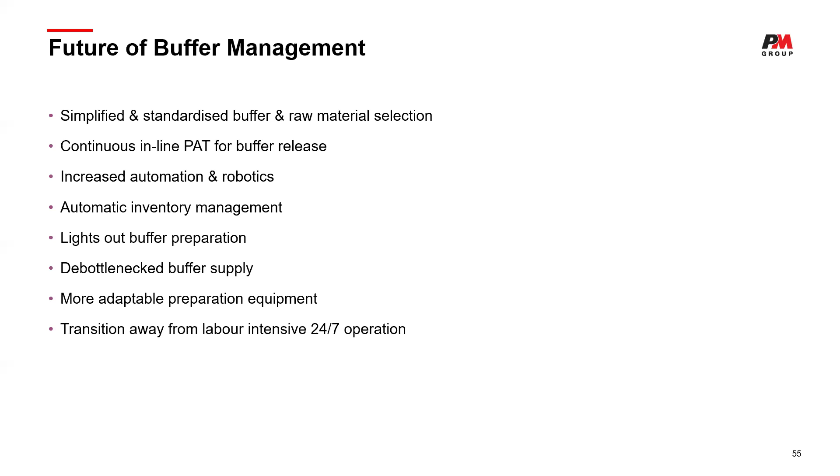I think there's been a lot of changes in the last few years in buffer prep. It started to get a lot more focus. We still need to go a lot further to actually realize those benefits across the industry. Look, it was a really whistle-stop tour of buffer prep. As it was mentioned there, it's literally my PhD topic, so I could pretty much speak about it all day. For those that are interested, I can get some of the links of the other papers sent on, which will go into far more detail.

The key takeaway for me is when we're designing a facility, the core process is defined during process development. Yes, we have to design it and make some changes. Buffer systems are probably one of the most customized aspects of it. There's so many different variables, both how you run it and how you design it. And it hasn't been given the focus it needs. And again, right now, buffer accounts for 20% of the cost of manufacture, a massive proportion of facility footprint. And also, it's a non-competitive, common area that if we fix buffer, we can do it across facilities.

So thanks, Kevin and Maria. Very interesting, very topical. So hopefully all the students here in the room with us, the emphasis, I think, was on sustainability. So really important in talking about life cycle and integrating that. And really interesting, that's Kevin's PhD topic. So you summarized it quite well, Kevin. I know you could have spent about 2 days talking about it. So thank you. And Maria, really interesting to see what the facility shift and the industry shift is, it's really interesting to see another alternative. So thanks for giving up your time.